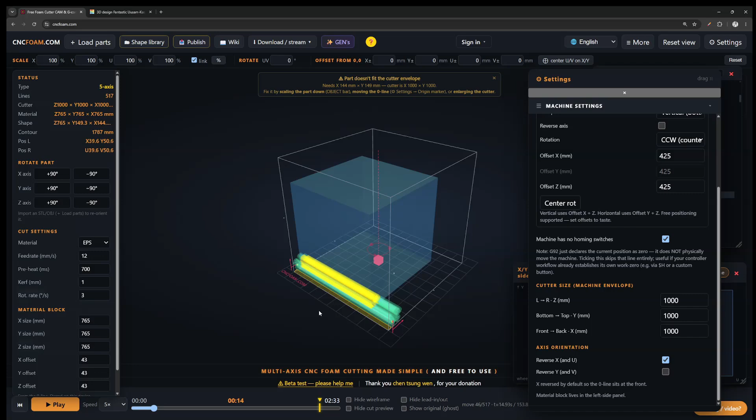Let's see, let's do a flower. So in this case it's an SVG, loading the SVG in, and we're clicking on generate cut. I'm going to pause the animation for now so we can kind of see what is all going on screen. Now if I rotate the machine a little bit and I zoom in, you can kind of almost make out that there's a part in there.

It's kind of hard to see, but you can see that the part has also been cut off because the big, in this case blue transparent box, is our material block and our part is currently outside of our material block. So you see the green outlines here, that's our original part, and the yellow part is where the part actually meets the material block. So in this case we're going to have to either move the material block or we're going to have to move the part.

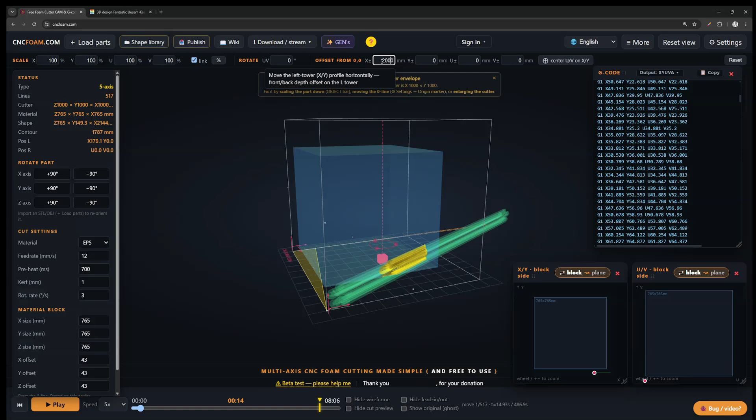First thing we will do is move the part, and we're going to move it backwards into the machine a little bit. We can do that by setting an offset. So first I'm going to do an X offset. 2000 is a lot. Let's do 200. So when we look at the other side of the machine, we can see that this is the X axis running from front to back, and we've just moved the X side 200 millimeters towards the back.

Now you see that the U side, because we have two independent towers on this particular machine, is still at 0. That's why the part is now angled. So let's move this to 200, and now the part is straight again.

Just to be on the safe side, you normally want to move your part up a little bit, but in this case we want to move it up quite a bit because you see that the bottom part is also cut off. So 50 is not enough, 150, well, let's do 200. And 200. Here we go again. So now you can see that the flower is all the way in the material block.

The flower is a little bit small, so we can also scale it. So let me first scale it universally. The link here is checked, so if I change one value, all the other values will change too. I can do that in percentage, or I can do that in millimeters. Let's do millimeters right now and make the flower 250 millimeters wide in the X direction. Now you see all the other values are popping up too.

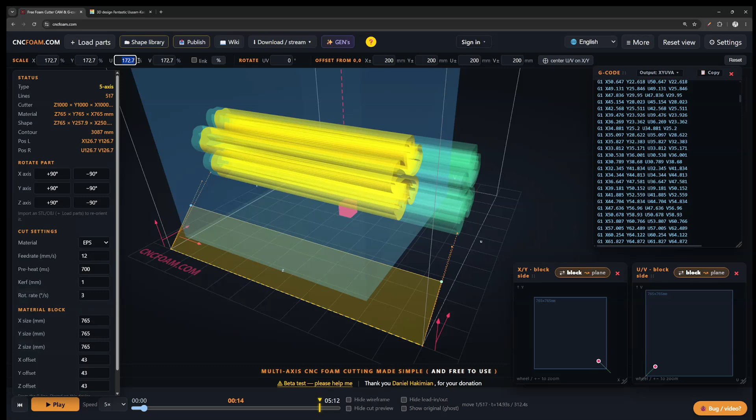Now you don't have to do that universally. You can also say, listen, I want to keep the X and the Y the same, but I want to make U and V a little bit bigger. So let's make that 220%, and let's do that 220% too. And then you see that the flower is kind of tapering a bit.

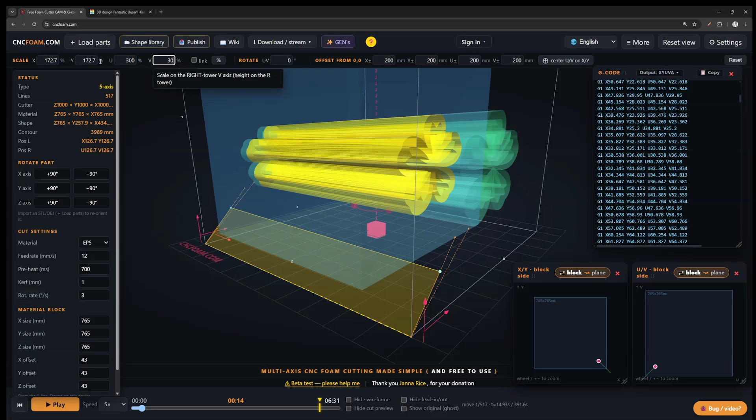Maybe it's a bit hard to see because there's not an awful lot of change. Maybe make it a little bit bigger, 300 and 300. You can also kind of see what's going on here.

Yeah, the left side is a small flower, right side is a bit bigger flower, and we can only do that because we have a 4-axis cutter loaded up right now, actually a 5-axis even, see here, but the rotation in this case is not going to do much. So really it's a 4-axis machine. X and Y are running independent of U and V, so that's why we can do shapes like these.

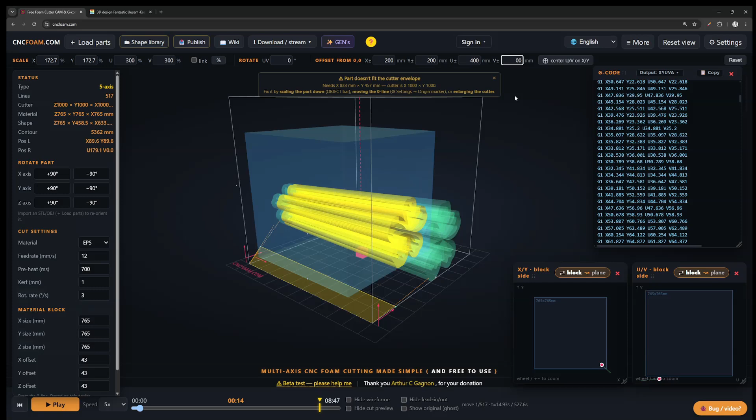Now the offset doesn't have to be the same on both sides either, so I can also offset U and V a little bit more than I did X and Y, and then you see that I get a shape that is growing in size but is also having different coordinates on the left and the right side.

Now if I run the simulation, you see that it starts at 0 and it's got quite a large lead in right now because I didn't really pay attention to where I put it in the material block. And it's going fairly slow right now, so let's speed it up a little bit. 25 times the 12 millimeters per second that we set here.

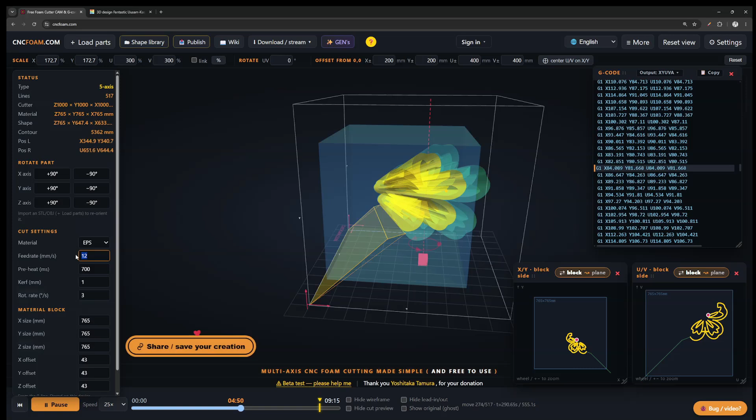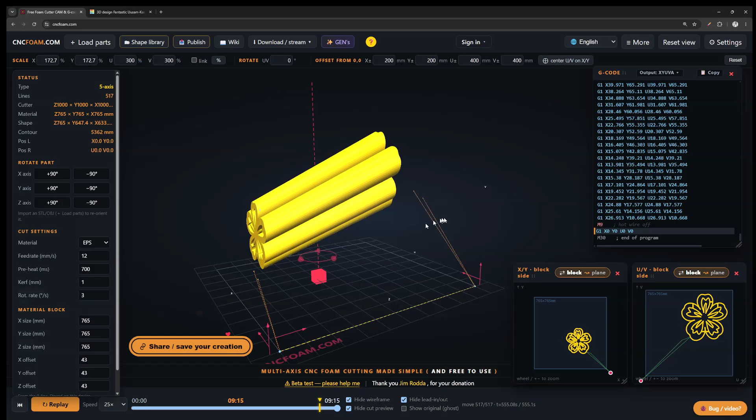And if we do run the machine at 12 millimeters per second, we see down here that the total cut would be 9 minutes and 15 seconds. It's a pretty big flower and a pretty big cut, so yeah, that takes almost 10 minutes. And then when it's all done, this is pretty much the shape you're gonna get. That's a bit of a weird shape in this particular case.

There are situations where you might want to have a tapered part, but this is just for demonstration, so you can kind of see what all is possible. One way where you would want to maybe have something slanted and beveled is like with a helical bevel gear. I've already done a video on that, but just to show you really quick.

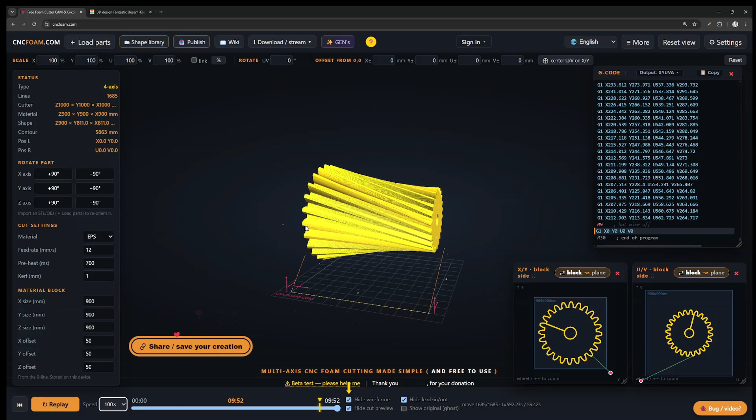Do it a little bit faster so we can see the end result. And you can see here that you're going from big to small, and you're even twisting the part while you're doing that. So for this you really need a 4-axis cutter too.

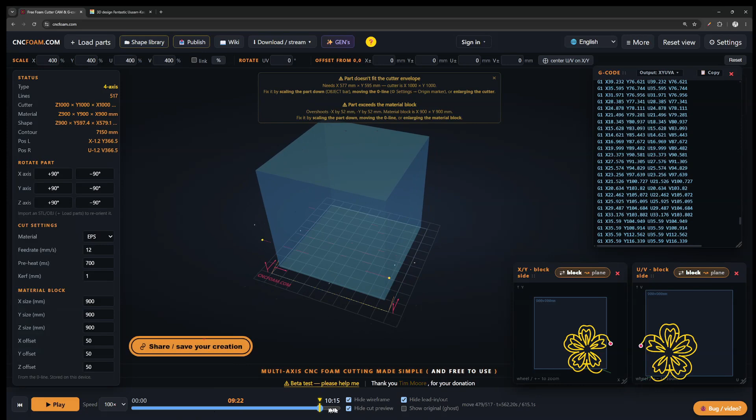I didn't show you the rotation up here actually. I forgot about that. That's really bad, so I'll do it really quick. I'll load my flower again. Oh, this is overlapping, that's not good. I will do a 400. Oh, should have left the checkbox on, but just to show you what's going on, I can drag this all the way out so we see a little bit better.

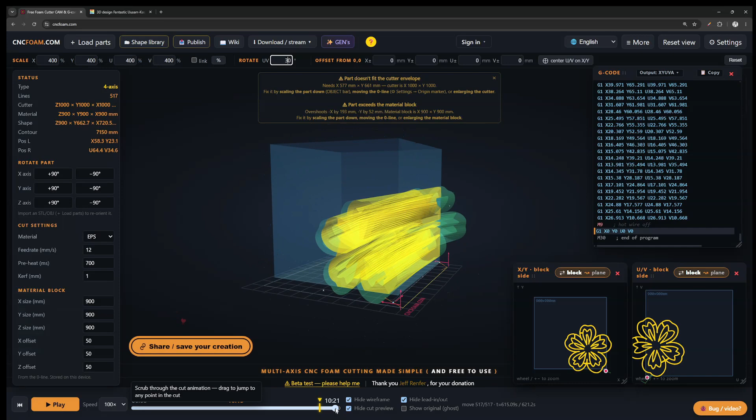See, this is our flower. It's still a bit cut off here because we didn't do the offset. But if we rotate the UV side now by 30°, you can kind of see that we're getting a twisted flower. It's hard to see. We can hide the boxes here. And there we go.

And you can see a little bit better how a twist would work. And you can also see here on the left and the right side that we have a big flower here and a small flower there. So that kind of gives you a little bit of an idea of what you can do with very simple shapes, and just by scaling, rotating, or offsetting a part in a 4-axis CNC foam cutter.